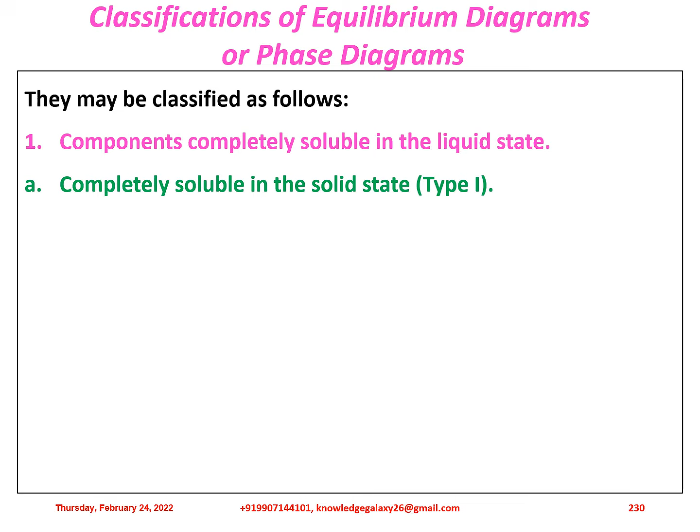So classification of equilibrium diagrams or phase diagrams, let us discuss in brief. They may be classified as follows. First is components completely soluble in the liquid state. Its subclassification part 1 is completely soluble in the solid state, they form the type 1. Next is insoluble in the solid state, that is the eutectic reaction, type 2.

Partly soluble in the solid state, the eutectic reaction type 3. Next is formation of a congruent melting intermediate phase, they form the type 4. Next is the peritectic reaction, type 5.

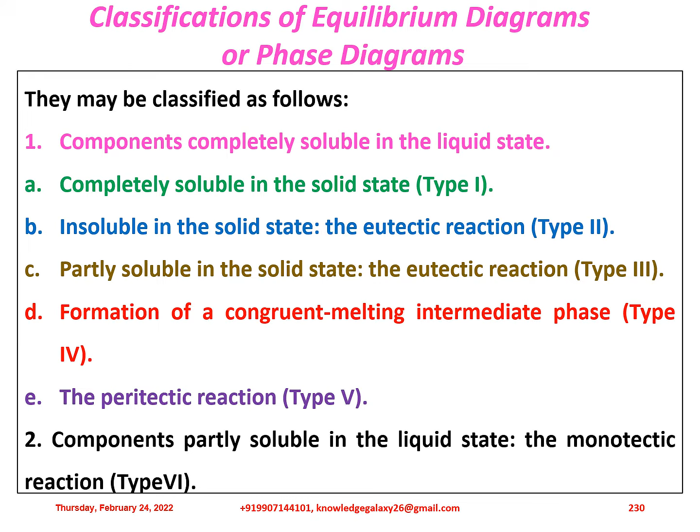Second classification type is components partly soluble in the liquid state, the monotectic reaction, they form the type 6. Next is components insoluble in the liquid state and insoluble in the solid state, they form the type 7.

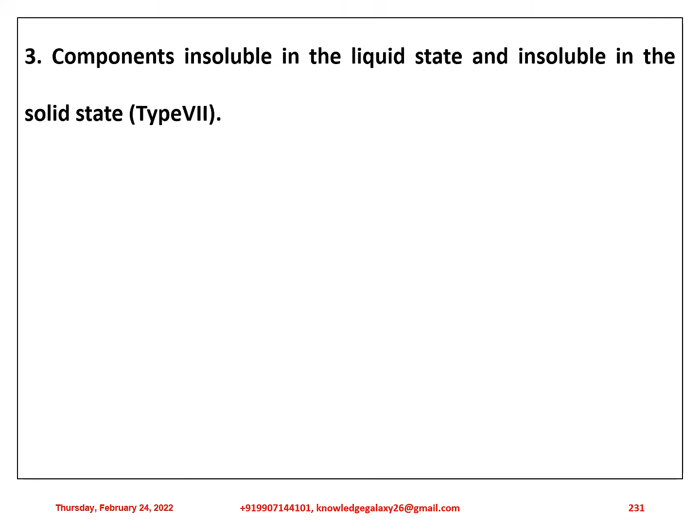Apart from these transformations taking place in liquid state, there are many transformations which take place in the solid state. So we will be discussing in brief about the transformations which take place in the solid state. First is allotropic change, next is order disorder change, third one is the eutectoid reaction, and the last one is the peritectoid reactions. We will be discussing about all of them in separate presentations.

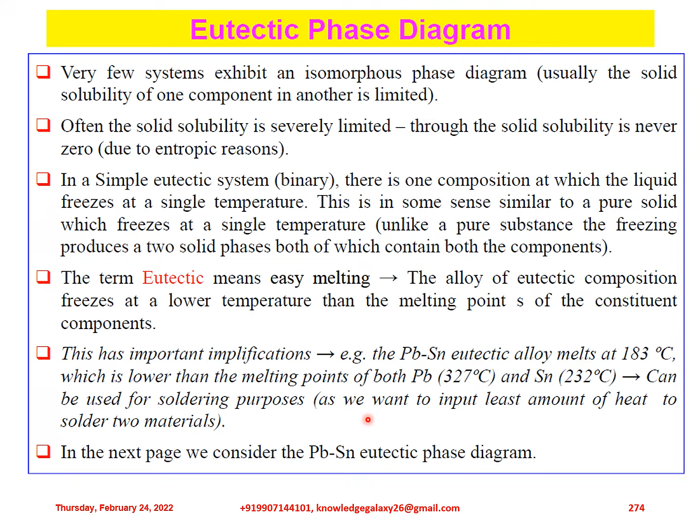For example, the PbSn eutectic alloy melts at 183 degrees Celsius, which is lower than the melting points of both Pb (plumbum), 327 degrees Celsius, and Sn (stannum), 232 degrees Celsius. This can be used for soldering purposes, as we want to input the least amount of heat to solder two materials. We will be discussing the PbSn eutectic phase diagram in detail in the coming slides.

So this is the eutectic phase diagram of Pb and Sn. As you can see, this is the temperature axis and this is the composition axis. Here, 327 degrees Celsius is the liquidus temperature of plumbum Pb, and 232 degrees Celsius is the liquidus temperature of stannum Sn.

At this particular point, where there is 62% Sn, the eutectic reaction takes place: the liquid, while solidifying, transforms to alpha plus beta. This line is depicted as the liquidus line, above which the alloy is in liquid state, and between the liquidus and the eutectic line the structure present is alpha plus liquid.

On this side, it is liquid plus beta, and this 183 degrees Celsius line is the solidus line of the eutectic alloy, below which the eutectic has the composition of alpha plus beta.

So at the eutectic reaction at 183 degrees Celsius, liquid of 62% Sn solidifies into alpha of 18% Sn and beta of 97% Sn, as depicted by these vertical lines at both ends.

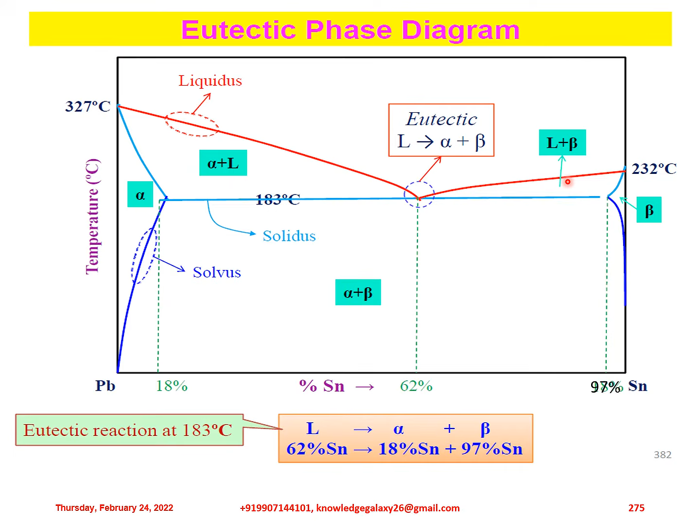Considering the phase diagram of the PbSn system, there are three types of alloys which are formed. Type 1 alloy has 62% Sn and 38% Pb. This is the eutectic alloy.

Type 2 alloy is 70% Pb and 30% Sn. The third type is 70% Sn and 30% Pb.

Let us discuss in detail about all these things and describe the eutectic system in detail.

It is seen that the solid solubility is limited for each of the two component metals, with alpha and beta representing primary solid solutions of different crystal structures.

A straight line, the eutectic horizontal, passes through the three phase compositions: alpha eutectic, liquid eutectic, and beta eutectic, at temperature T eutectic. This line is a collapsed three-phase triangle. At any point on this line, three phases are in equilibrium.

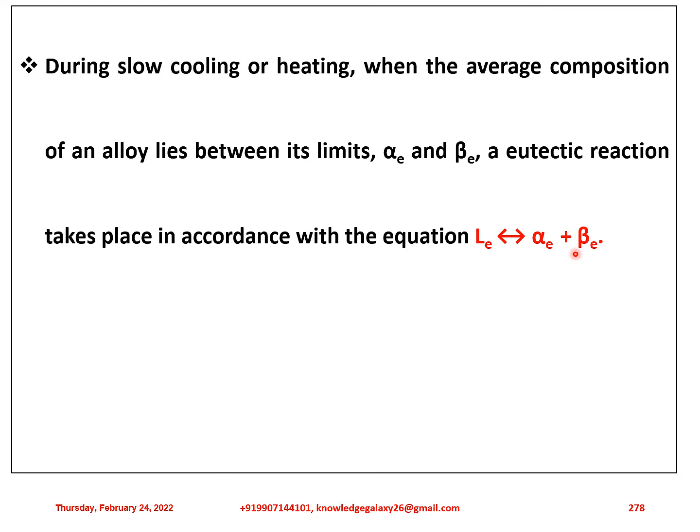During slow cooling or heating, when the average composition of an alloy lies between its limits alpha eutectic and beta eutectic, a eutectic reaction takes place according to the equation: L eutectic (liquid eutectic) transforms while solidification into alpha eutectic plus beta eutectic, and while on liquefaction, alpha eutectic plus beta eutectic transforms into liquid eutectic while heating.

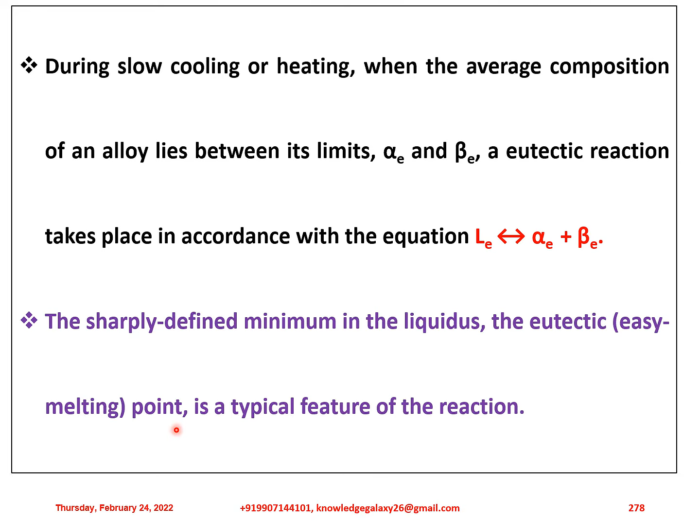The sharply defined minimum in the liquidus, the eutectic easy melting point, is a typical feature of the reaction.

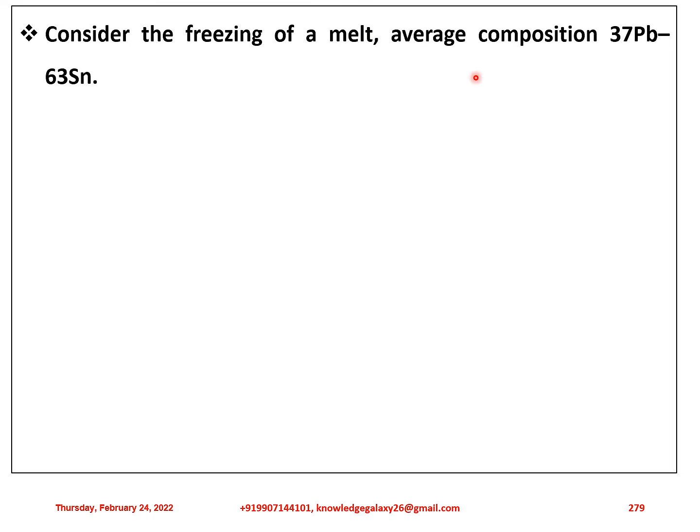Consider the freezing of a melt of average composition 37 Pb and 63 Sn. At the temperature T eutectic of approximately 183 degrees Celsius, it freezes abruptly to form a mechanical mixture of two solid phases: liquid L eutectic transforms on solidifying into alpha eutectic plus beta eutectic.

From the lever rule, the alpha by beta mass ratio is approximately 9 by 11.

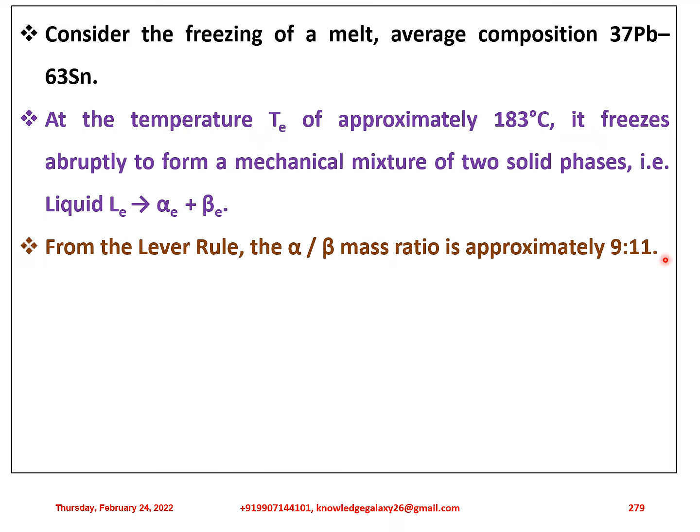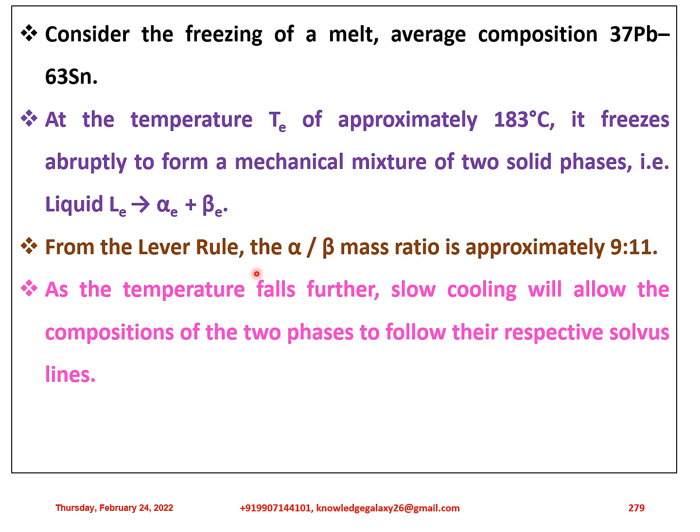As the temperature falls further, slow cooling will allow the compositions of the two phases to follow their respective solvus lines. I have made a separate presentation video on the lever rule which is available on my channel. You can visit that also for reference and clarifying your doubts regarding lever rule.

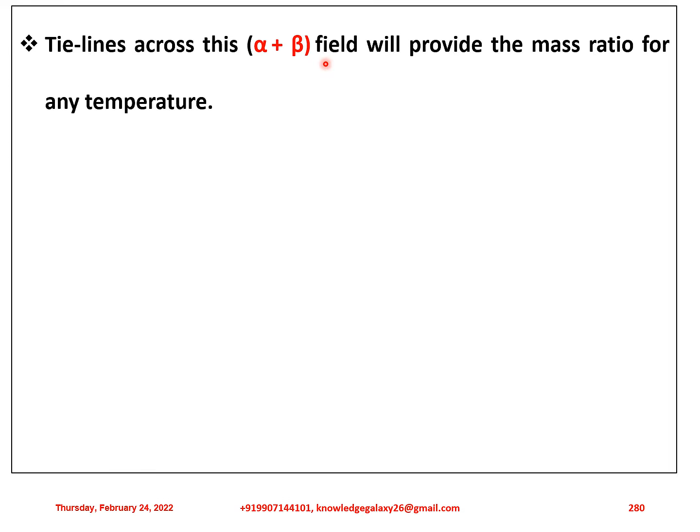Tie lines across this alpha plus beta field will provide the mass ratio for any temperature.

In contrast, a hypoeutectic alloy melt, say of composition 70 Pb and 30 Sn, will form primary crystals of alpha over a range of temperature until T eutectic is reached.

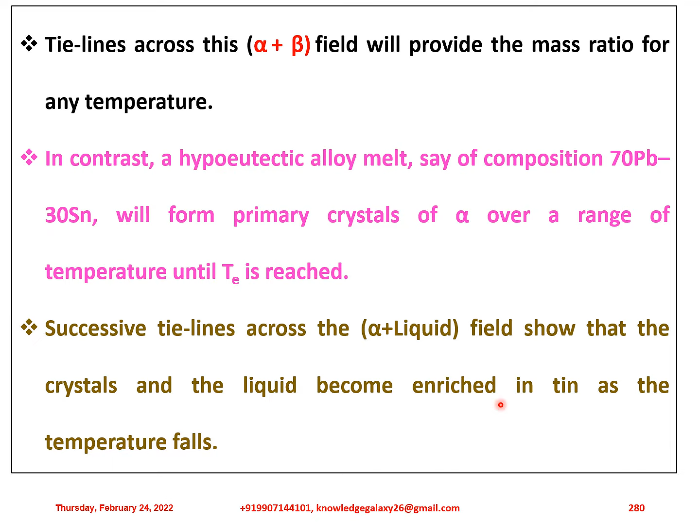Successive tie lines across the alpha plus liquid field show that the crystals and the liquid become enriched in tin as the temperature falls.

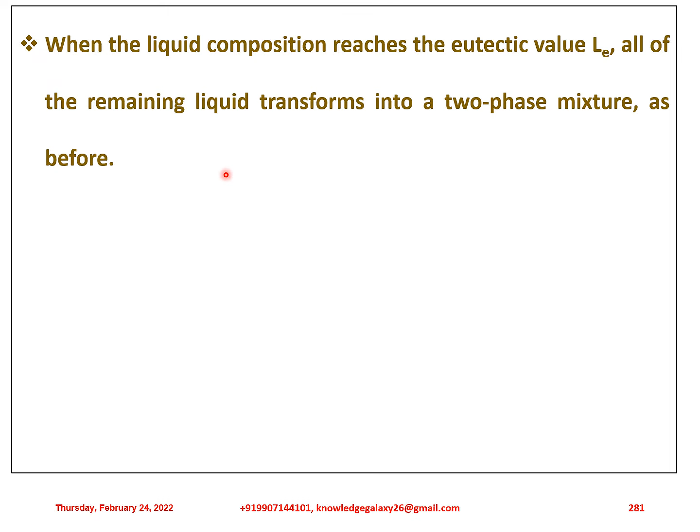When the liquid composition reaches the eutectic value L eutectic, all of the remaining liquid transforms into a two-phase mixture as before. However, for this alloy, the final structure will comprise primary grains of alpha in a eutectic matrix of alpha and beta. I hope it is very much clear to you all.

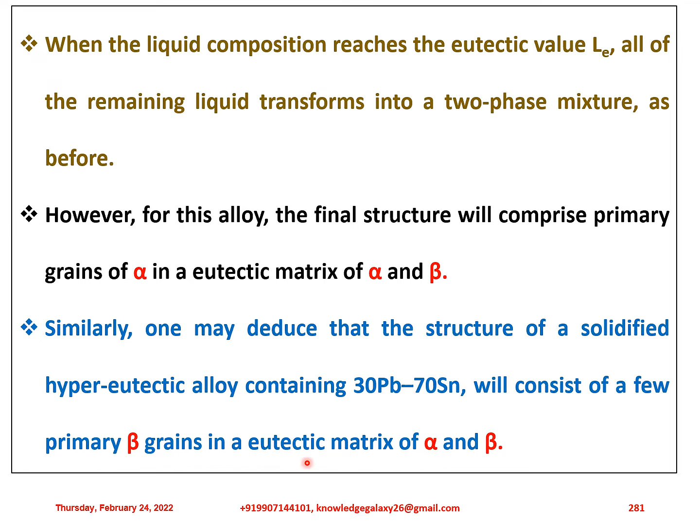Similarly, one may deduce that the structure of a solidified hypereutectic alloy containing 30 Pb and 70 Sn will consist of a few primary beta grains in a eutectic matrix of alpha and beta.

Low lead or low tin alloys with average compositions beyond the two ends of the eutectic horizontal freeze by transforming completely over a small range of temperature into a primary phase. Changes in composition are similar in character to those described above.

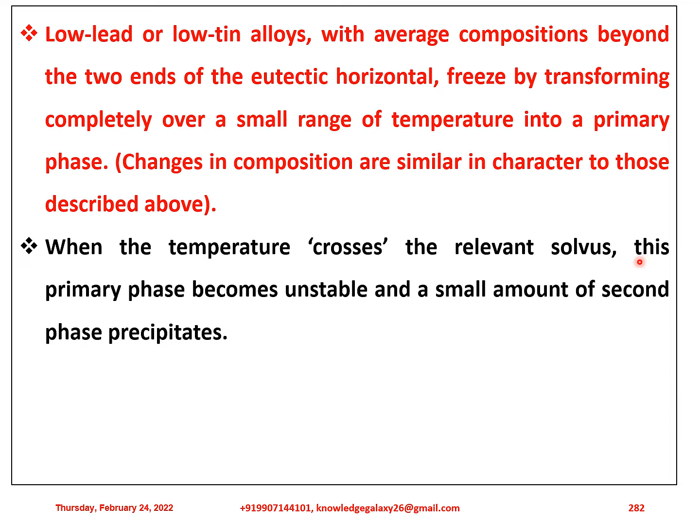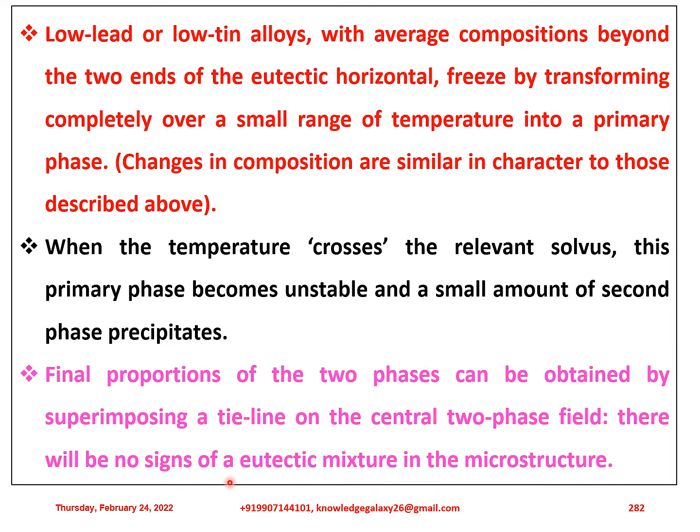When the temperature crosses the relevant solidus or solvus line, this primary phase becomes unstable and a small amount of second phase precipitates. Final proportions of the two phases can be obtained by superimposing a tie line on the central two-phase field. There will be no signs of a eutectic mixture in the microstructure.

The eutectic, that is having 37 Pb and 63 Sn, and hypoeutectic having 70 Pb and 30 Sn alloys chosen for the description of freezing represent two of the numerous types of solders used for joining metals. So it is very much important how they form, which I have just described.

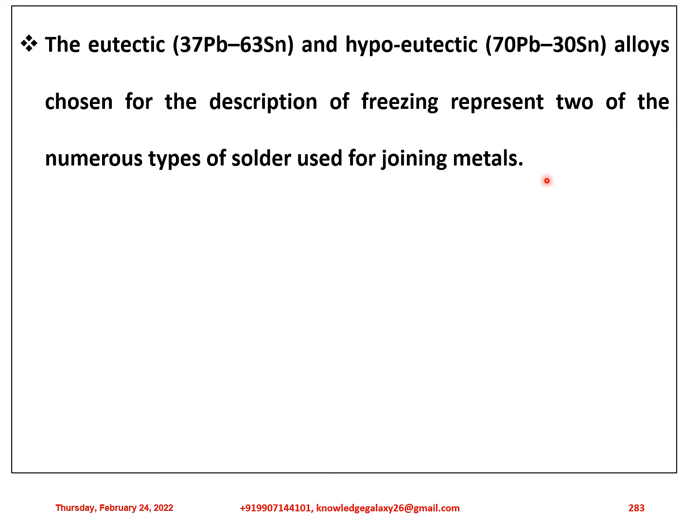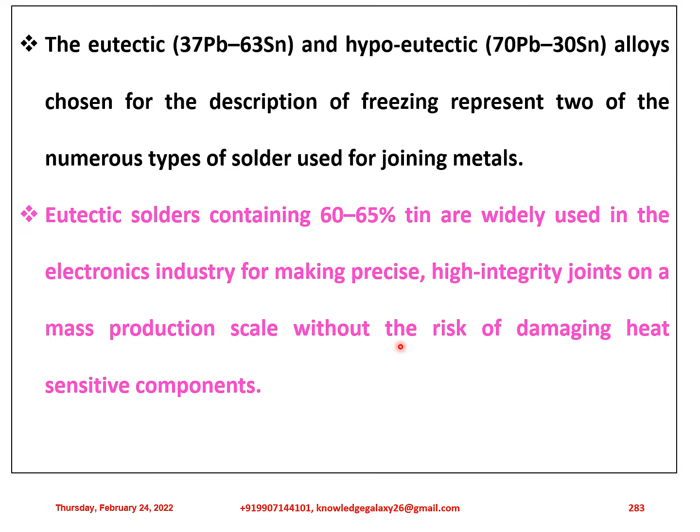Eutectic solders containing 60 to 65% tin are widely used in the electronics industry for making precise high integrity joints on a mass production scale without the risk of damaging heat sensitive components.

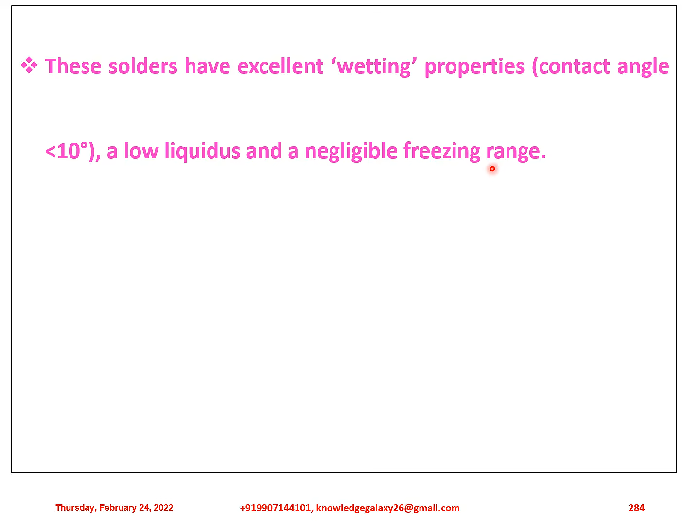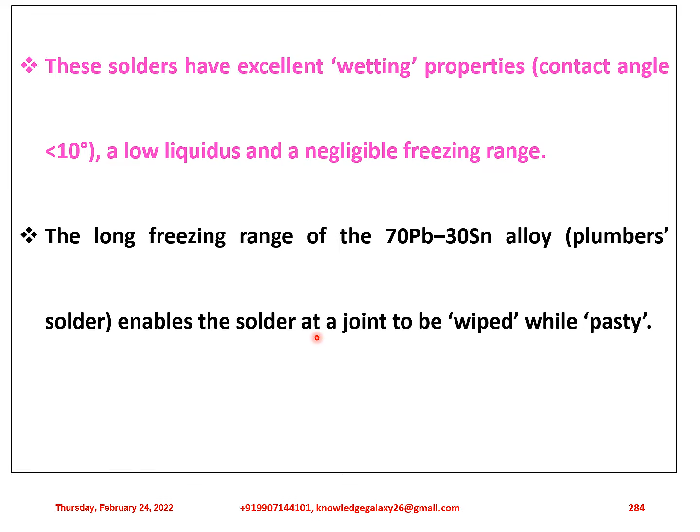These solders have excellent wetting properties which have contact angle of less than 10 degree, a low liquidus and a negligible freezing range. The long freezing range of the 70 Pb and 30 Sn alloy, that is called plumber's solder, enables the solder at a joint to be wiped while pasty.

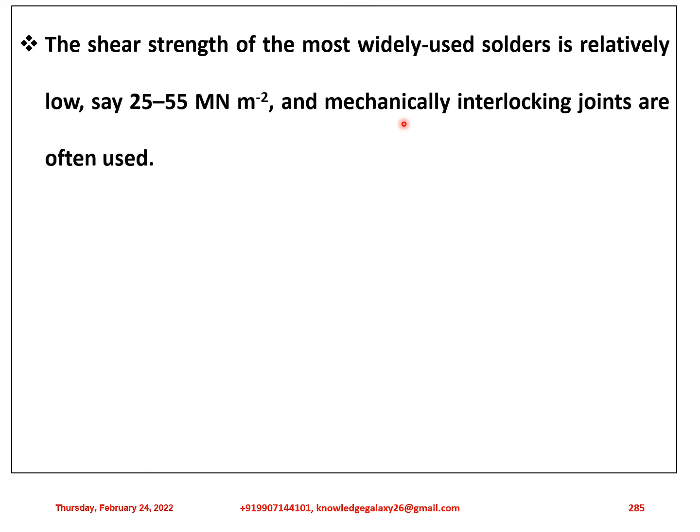The shear strength of the most widely used solders is relatively low, say for example 25 to 55 meganewtons per square meter, and mechanically interlocking joints are often used.

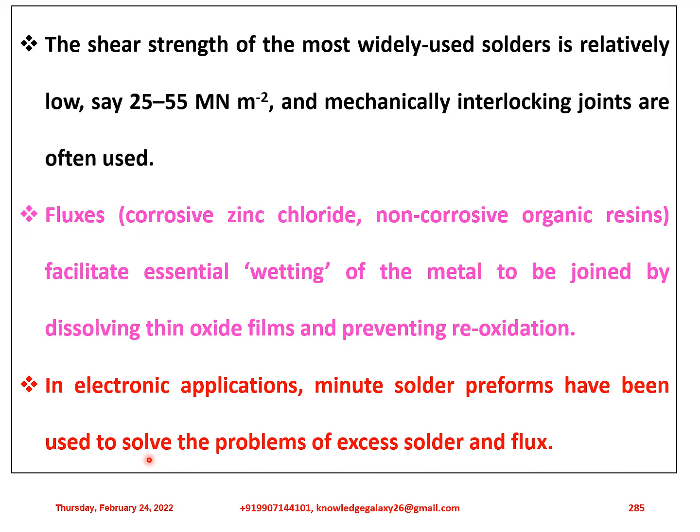Fluxes, which are corrosive zinc chloride, non-corrosive organic resins, facilitate essential wetting of the metal to be joined by dissolving thin oxide films and preventing reoxidation. In electronic applications, minute solder preforms have been used to solve the problems of excess solder and flux.

We are again considering the phase diagram of Pb–Sn system. This alloy 1 is having 63% Sn and 37% Pb. Alloy 2 is having 70% Pb and 30% Sn. And third alloy is 70% Sn and 30% Pb.

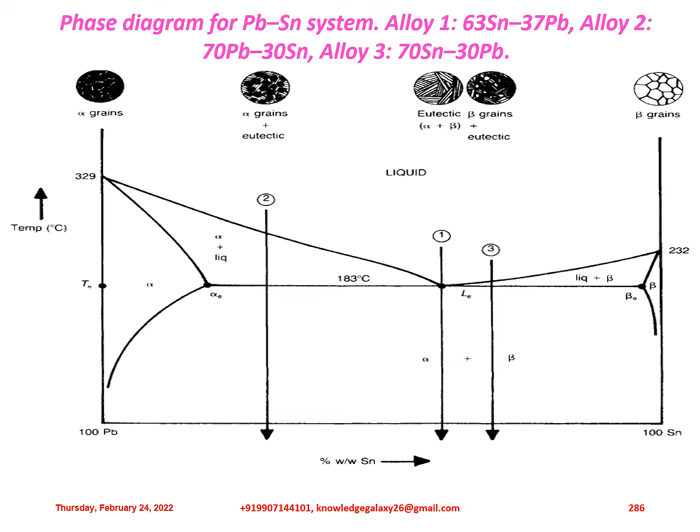This picture I have already shown, but here I have again mentioned it to describe something in more detail. So let us go. The above figure shows the sequence of structures obtained across the breadth of the Pb–Sn system.

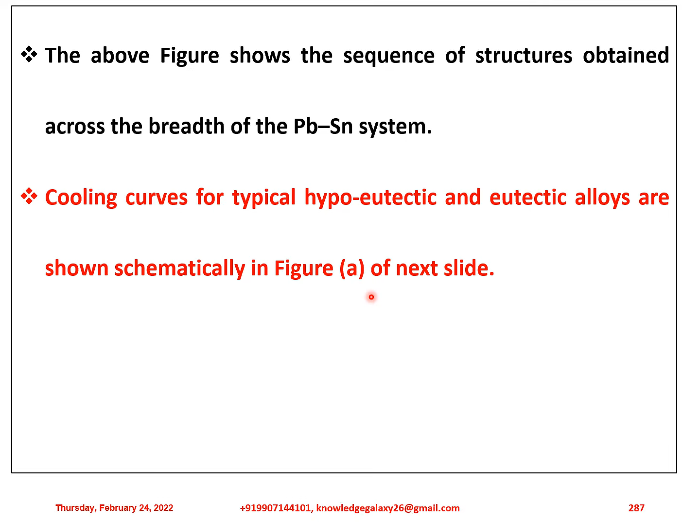Cooling curves for typical hypoeutectic and eutectic alloys are shown schematically in figure A of the next slide. Separation of primary crystals produces a change in slope while heat is being evolved.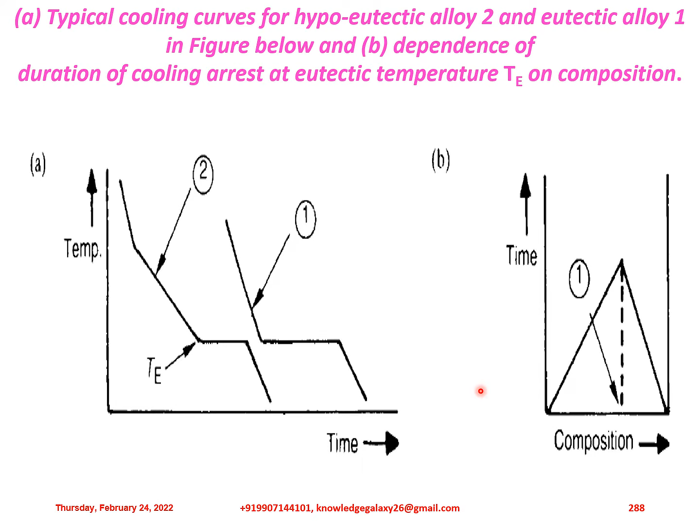And this diagram also shows the time versus composition. I hope it is very much clear to you all.

Much more heat is evolved when the eutectic reaction takes place. The lengths, that is duration of the plateaus, are proportional to the amounts of eutectic structure formed, as summarized in figure B.

Although it follows that cooling curves can be used to determine the form of such a simple system, it is usual to confirm details by means of microscopical examination, that is optical scanning electron and X-ray diffraction analysis.

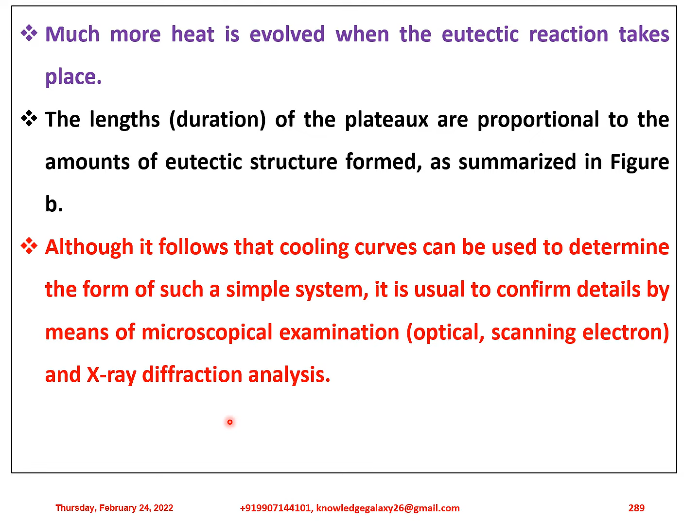Now we are going to discuss some microstructural characteristics of the eutectic system. In this figure, the eutectic system of tin and lead is considered, with two different types of eutectic alloys. We will discuss them separately in the coming slides.

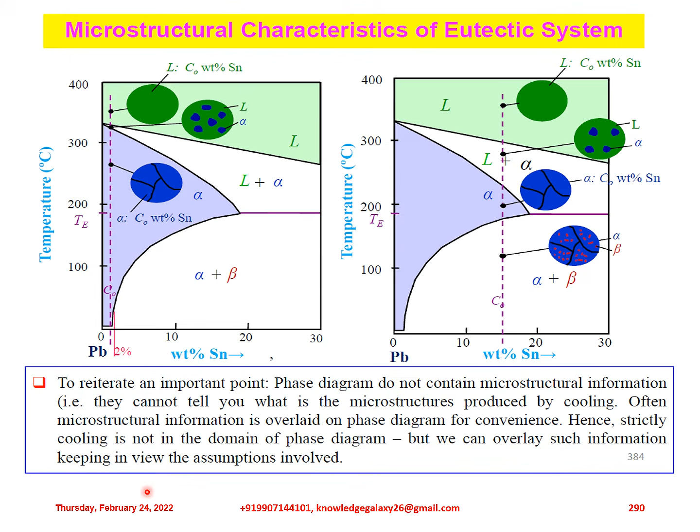To reiterate an important point: phase diagrams do not contain microstructural information, that is, they cannot tell you what microstructures are produced by cooling. Often, microstructural information is overlaid on the phase diagram for convenience. Hence, strictly, cooling is not in the domain of phase diagrams, but we can overlay such information keeping in view the assumptions involved.

Considering the microstructural characteristics of the eutectic system, we will consider 18.3 weight percent tin, which is less than C0 composition, and less than 61.9 weight percent tin. So the microstructure consists of alpha crystals and a eutectic microstructure.

At this particular point, liquid is having L C0, that is weight percent of tin, and where the solidus and liquidus start, the L and alpha phases are present. These are different denominations, so let us describe them.

Just above TE, that is T eutectic, C alpha is having 18.3 weight percent stannum, and C liquid is having 61.9 weight percent stannum.

So weight of alpha is equal to S divided by R plus S. S is this length, and R plus S is the total length. It comes to approximately 50%. Weight of liquid is equal to 1 minus weight of alpha, which gives 50%.

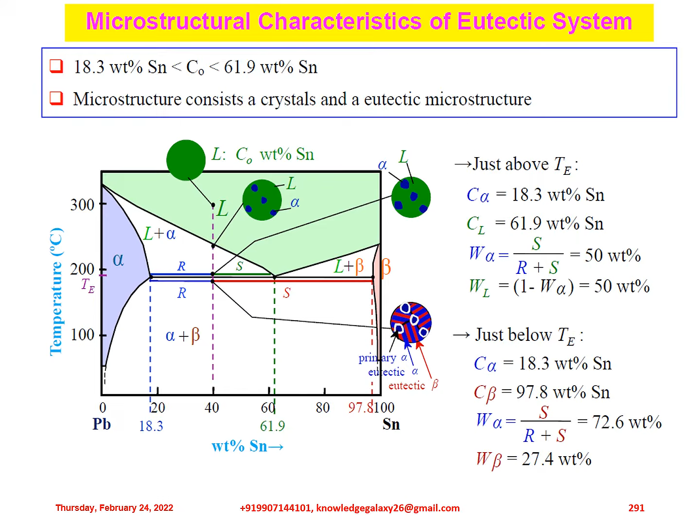You can pause the video and observe this picture in more detail, noting all the phases present and their proportions. I hope we are going so far so good.

Now let us consider hypoeutectic, eutectic, and hypereutectic. What are these phases and where are they formed? Considering this system, at this particular point, this is the eutectic having 61.9% tin. To the left of this eutectic line, this region is called hypoeutectic, and to the right of eutectic, this region is called hypereutectic.

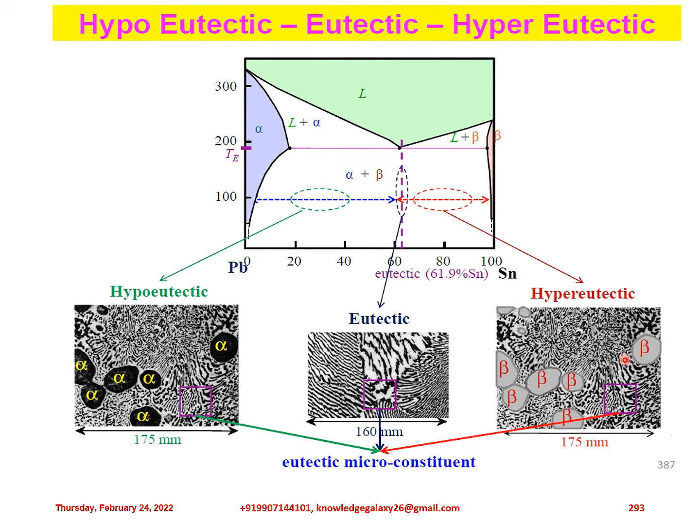Now let us consider some further examples of the eutectic system. We will consider the copper-silver (Cu-Ag) eutectic system. Raoult's law states that the freezing point of a pure substance will be lowered by the addition of a second substance, provided the latter is soluble in the pure substance when liquid and insoluble when solidified. The amount of lowering of the freezing point is proportional to the molecular weight of the solute.

You can again refer to this picture having copper and silver. This is the eutectic reaction, this is the eutectic temperature TE, and this is C0, that is, the eutectic composition. All the variables are mentioned here. The limited solubility alpha phase is mostly copper, and beta phase is mostly silver.

Beta is having mostly argentum, that is silver. So T eutectic has no liquid below T eutectic, meaning above this temperature there is purely liquid, and below this there is no liquid below this temperature, C is the minimum melting at T eutectic. Here three single phase regions, that is liquid, alpha and beta, exist at 71.9 weight percent argentum at 779 degrees Celsius, commonly known as eutectic.

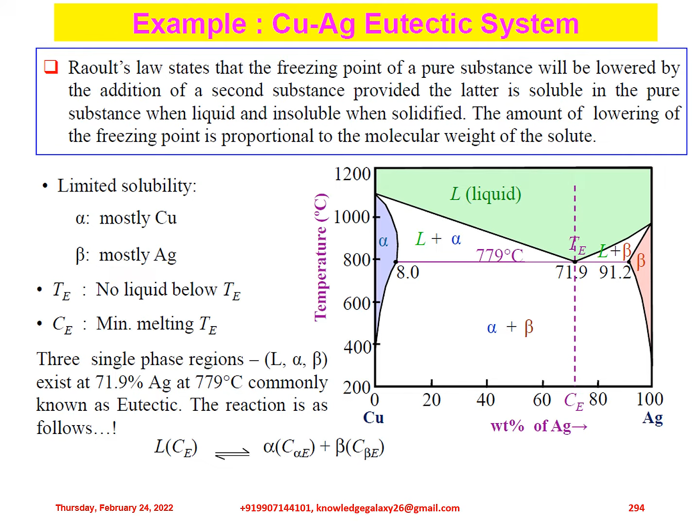The reaction is as follows: L at C eutectic, on solidification gives alpha at C alpha eutectic plus beta at C beta eutectic, and on heating the reverse reaction takes place. The eutectic reaction states that at the eutectic point, liquid on solidification transforms into two solid phases, and these two solid phases on heating transform into a common liquid. This happens at a particular temperature.

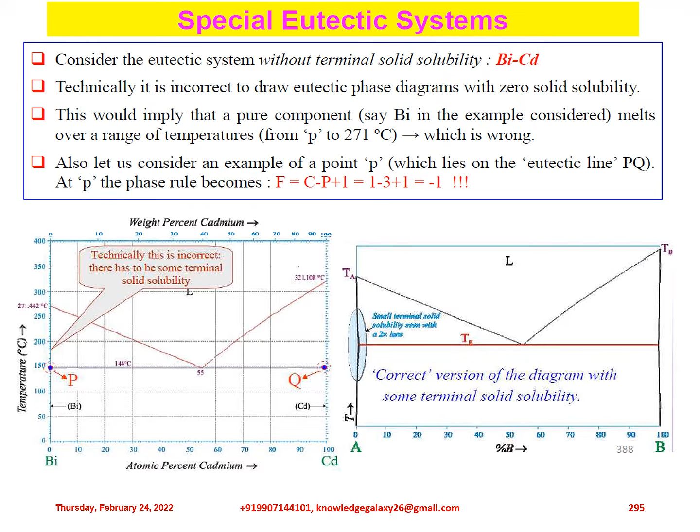Let me explain it further. Note the above is an alternate way of arriving at the obvious contradiction that at P, on one hand we are saying that there is a pure component, and on the other hand we are considering a three-phase equilibrium, which can happen only for bismuth cadmium alloys.

In eutectic systems, at eutectic point E, three phases coexist: liquid, alpha and beta. The number of components in a binary phase diagram is 2, so the number of degrees of freedom F becomes 0. This implies that the eutectic point is an invariant point. For a given system, it occurs at a fixed composition and temperature.

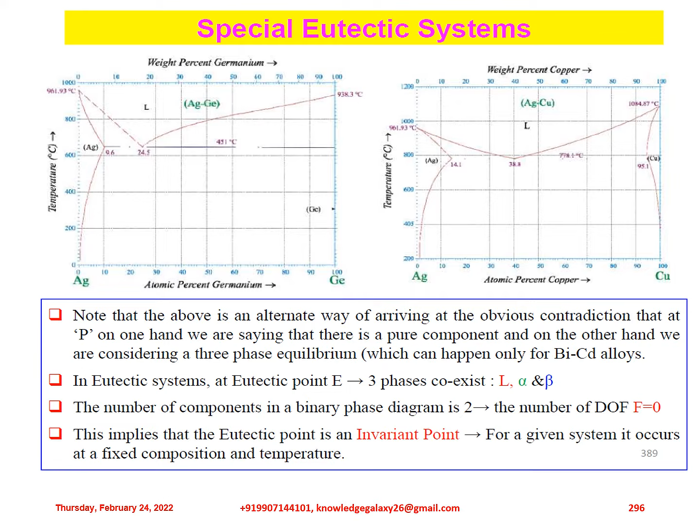Please note this particular line, it is very much important, so I am repeating this: this implies that the eutectic point is an invariant point. For a given system, it occurs at a fixed composition and temperature. I hope I am making this a very clear point to all of you, and all are understanding it very clearly.

Now we will be discussing the application of the lever rule in eutectic systems. I will be explaining it with the help of some solved examples.

Let us first consider a 40 weight percent tin, 60 weight percent lead alloy at 150 degrees Celsius. Find the phases present, alpha and beta, and the composition of phases given as C0 equals 40 weight percent tin, C alpha equals 11 weight percent tin, and C beta equals 99 weight percent tin. This is the Pb-Sn phase diagram. We are considering this particular point. Applying the lever rule in the eutectic system is explained in this diagram. This is C0, 40 weight percent tin. We will calculate the different phases present in this 40 weight percent tin phase alloy.

Weight fraction of alpha equals S divided by R plus S, the total length. This comes to C beta minus C0 divided by C beta minus C alpha. Putting the values: 99 minus 40 divided by 99 minus 11 equals 59 divided by 88, which comes to 67 weight percent.

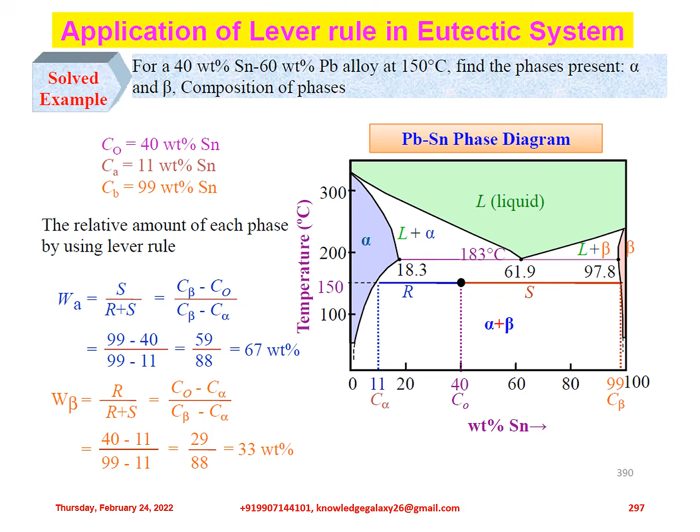Now weight percentage of beta equals R divided by R plus S, the total length. So C0 minus C alpha divided by C beta minus C alpha. Putting the values: 40 minus 11 divided by 99 minus 11 reduces to 29 by 88, equal to 33 weight percent. I hope the application of the lever rule in the eutectic system is very much clear. This is one example. Let us now consider the second example.

Second example is for 40 weight percent tin and 60 weight percent Pb alloy at 220 degrees Celsius. Find the phases present: alpha and liquid. Composition of phases given is C0 equal to 40 weight percent tin, C alpha equal to 17 weight percent tin, and C liquid equal to 46 weight percent tin.

Again considering the same PbSn phase diagram, but here the temperature has been risen. So here the temperature point is T, this. So we will be considering the various phases present at this particular temperature.

Weight percentage of alpha is equal to Cl minus C0 divided by Cl minus C alpha. Putting the values, it gives 46 minus 40 divided by 46 minus 17, which reduces to 6 divided by 29, equal to 21 weight percentage.

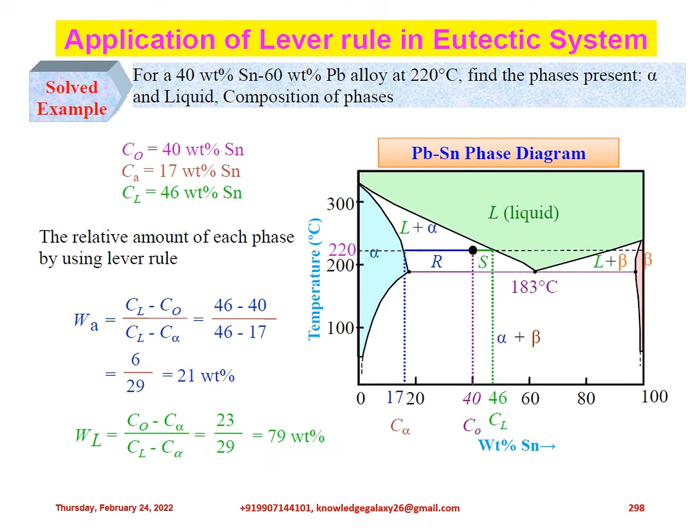Weight of liquid is calculated as C0 minus C alpha divided by Cl minus C alpha. Putting the values gives 23 by 29, equal to 79 weight percentage. All values are mentioned here. You can pause the video and observe the picture and calculate them yourself to get better clarity on the lever rule and its application in the eutectic system.

I hope I have made all the points very clear. So let us now further explain it with the help of another example.

During the solidification of an off-eutectic PbSn composition C0, 90 volume percent of solid consisted of the eutectic mixture and 10 volume percent of the pro-eutectic beta phase. Here we have to calculate the value of C0. My dear friends, these type of questions are also asked in various exams where you have to calculate the C0 composition at which a particular composition will happen.

The given data is density data for alpha and beta: rho alpha equal to 10,300 kg per cubic meter, rho beta equal to 7,300 kg per cubic meter, and eutectic data is 183 degrees Celsius eutectic temperature, and 62 weight percentage content of stannum.

Let us start with some observations. Lead (Pb) is heavier than stannum, hence the density of alpha is more than that of beta. Since the pro-eutectic phase is beta, the composition is hyper-eutectic towards the Sn side.

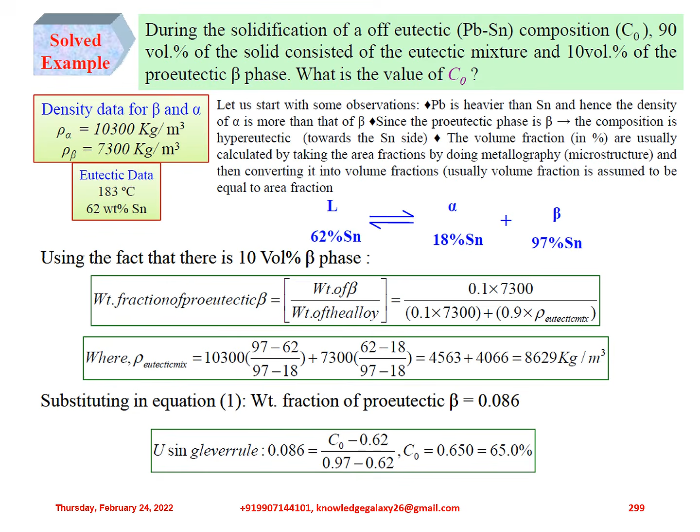I hope this calculation is very much clear to all of you. Please don't get confused. If you have any doubt, please repeat the presentation and clearly understand each topic, each point very seriously, very sincerely.